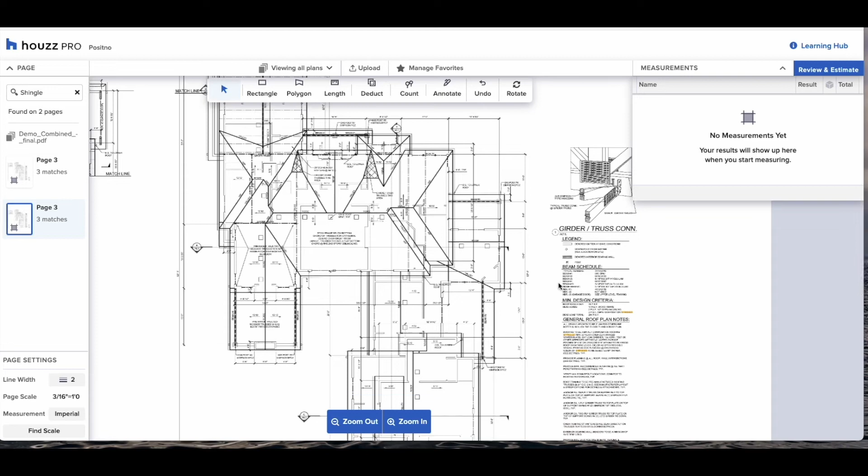Simply, I'm going to type in shingles, and this will return the exact pages it's returned on and how many times that word appears on the page. This is really handy and it will help you never miss a material again.

Then we have our line width here. I'm going to show you how that's applicable in a minute.

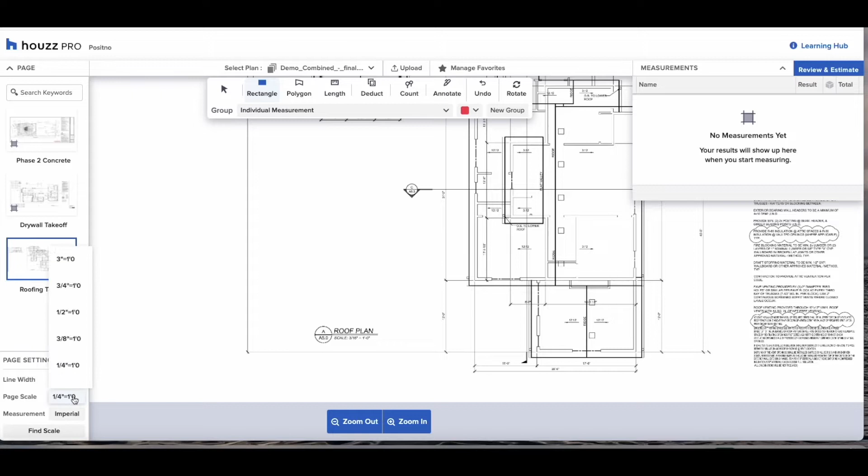Then importantly, we have the page scale. Houzz Pro is automatically set as a 1/4 inch is equal to a foot. But as you can see here, these plans are 3/16 is equal to a foot. Simply select it from the drop down and you should be ready to measure.

Best practice, however, is to make a known length to ensure that the plans are calibrated. Select the length tool, click to start, double click to finish. And if this matches up, you know that everything is good to go and all of your measurements will be good going forward.

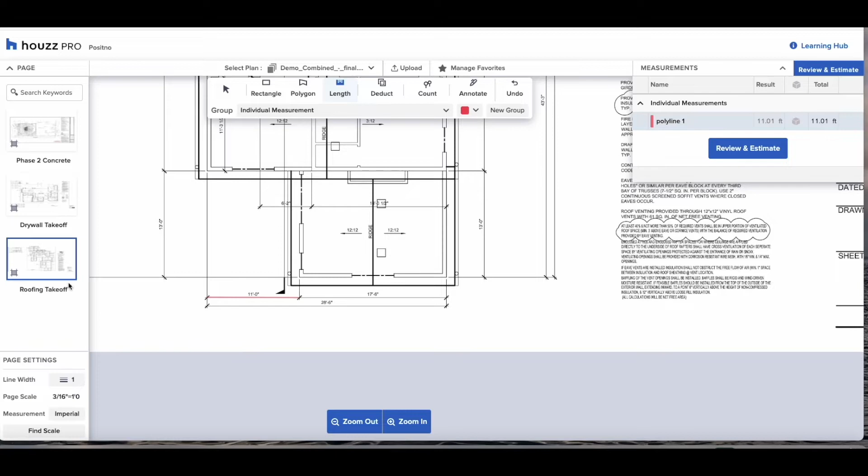Now let's get into the takeoff itself. Best practice is to familiarize yourself with the plans and then set up your groups ahead of time.

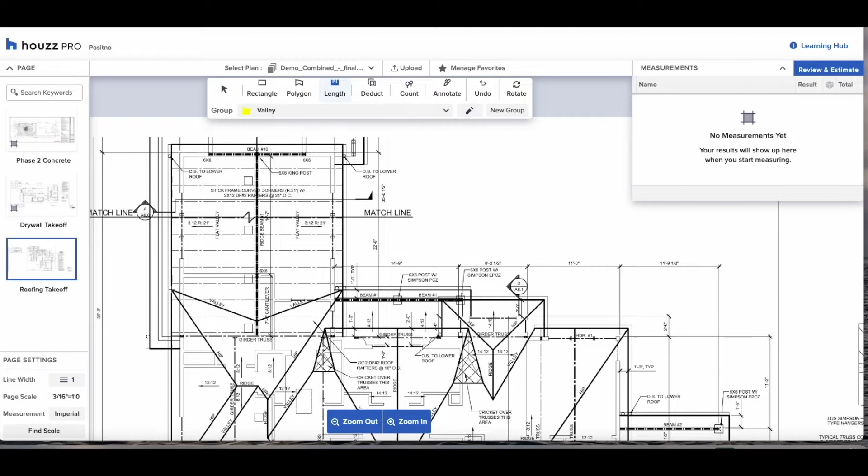Here we're going to set up our valleys, give it a name, give it a color. If it's something we measure every time we set up a plan on Houzz Pro, you can add it to your favorites. This will associate it with your account so that it will be ready to measure in that drop down every time you upload a project.

Once that's selected, you can add into that group continuously. Click to start, click to drop a marker and change direction, and double click to finish. Here is where you might want to add a thicker line width, just so it's obvious on the plans what it is that you've measured.

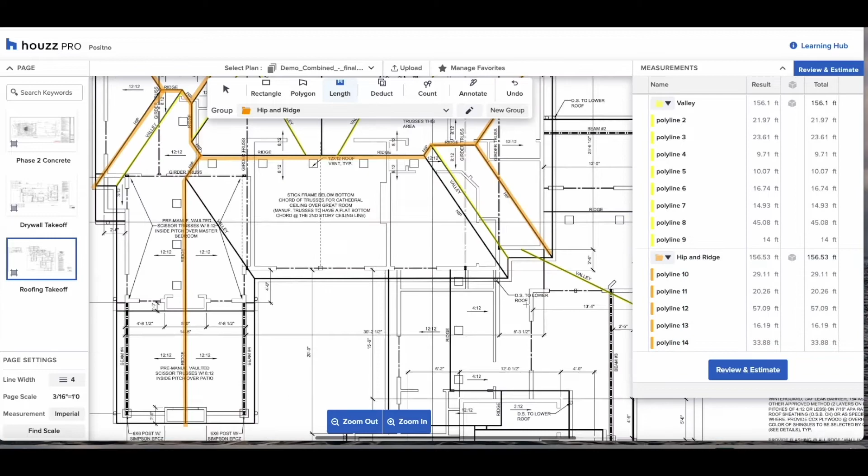Next, we are going to measure our hip and ridges. Because we've already got this group set up, you click the length, hit the drop down, and you'll select the group hip and ridges. Because we have these groups selected, you can see all of the individual measurements go into the folder, and it'll give us a sum total of the group.

Now we are going to measure the roof. We're going to select the polygon for this, and this works the same as the length. You click to start, click to drop a marker and change direction. And when you've finished, double click to complete the perimeter and you get that area.

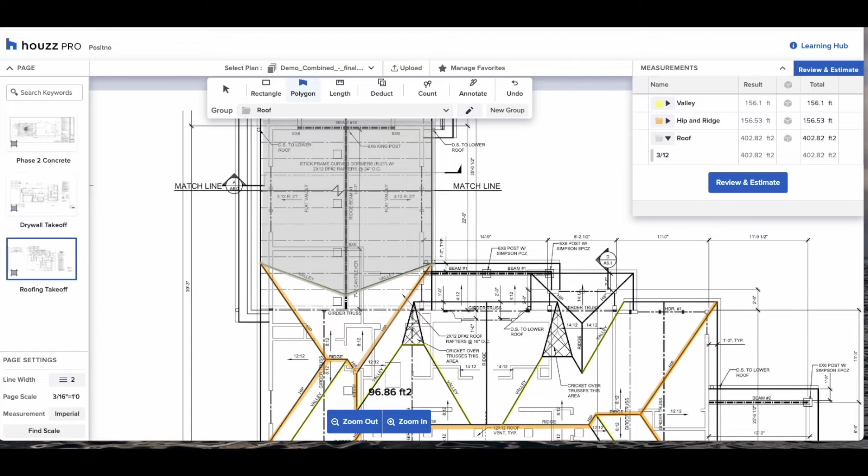What we're doing here is naming the individual measurements that make up the groups, and I'm going to give them the pitch of the roof itself. So 3/12, 8/12, 12/12, etc.

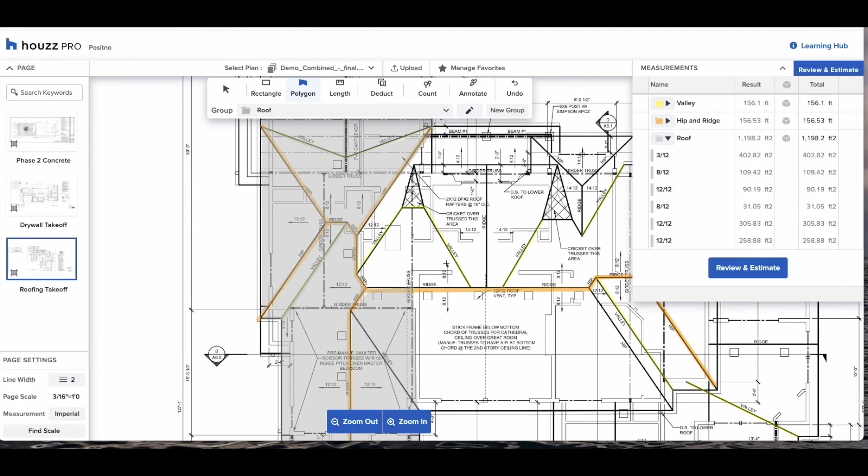This is where it becomes very handy for roofers. What we can do is add in a pitch to get the total square footage of the roof itself. By checking the blue box in the middle of the measurements drawer, it will give you the option to add additional parameters such as height, width, depth, and in this case, we're going to add in our pitch.

So I'm going to give the entire group the pitch of 8/12, which will be applied to all of the individual measurements. Now what we can do is go into the individual measurements and change them on an individual basis. So in this example, 3/12.

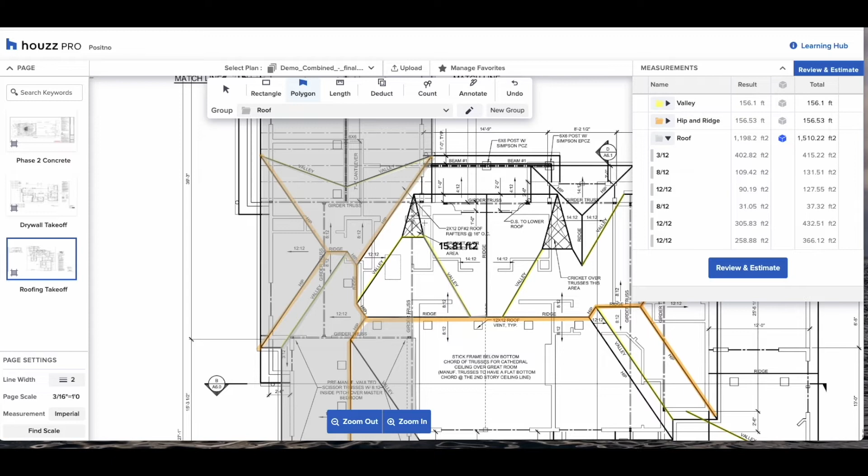What's important to note here is that any individual measurements added to the group roof afterwards are going to take on the group pitch of 8/12. So you'll see here, I'm going to measure another part of the roof, which is 14/12. What I need to do is go in and change that at an individual level again. Again, the more you label it, the clearer it's going to be.

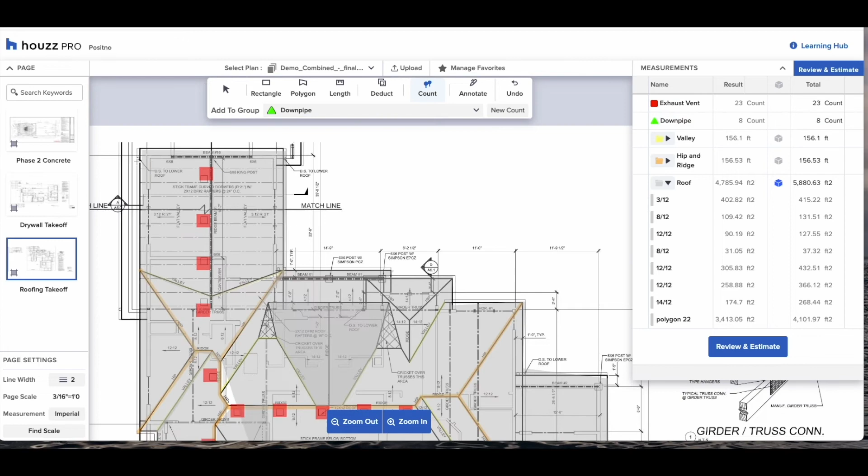Now we're going to do the count. So simply check the count, hit the exhaust vent from the drop down, go around the canvas, clicking where you see exhaust vents, and you will get a sum total in the measurements drawer as usual. Same is applied for downpipes and anything you can think to count.

Now we're going to run through the annotation feature. This is really good when you want to be specific with either clients, guys on site, or general contractors. It avoids confusion and costly mistakes once you get on site.

By clicking Annotate, it's automatically selected for text. You can begin to type your text and be specific in your instructions or get clarifications on things you're not sure of. Use the arrow feature to point to exactly what it is that you're referring to.

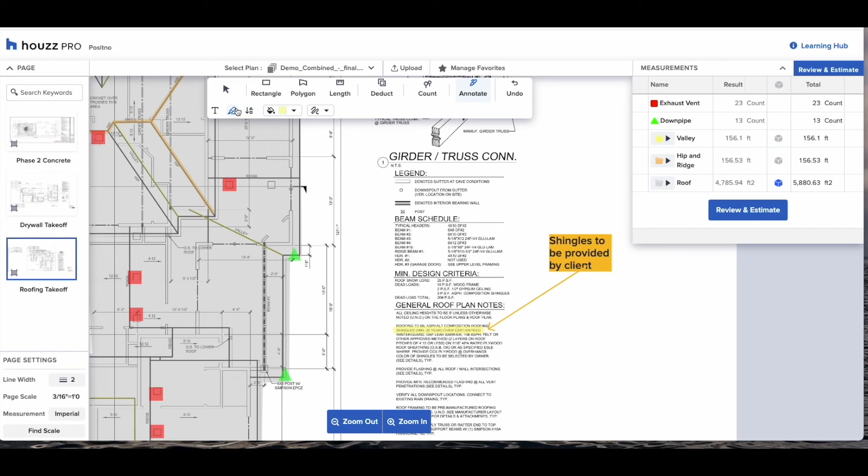You've got the highlighting feature, which will allow you to highlight specific parts of the plan, as well as the cloud function, which will allow you to draw attention to that part of the plan as well.

This has been a really general overview on how you can use Houzz Pro to do your roofing takeoff. If you have any questions, be sure to reach out to our product experts and we'll be happy to set up a demo and run through all of your questions on an individual basis.